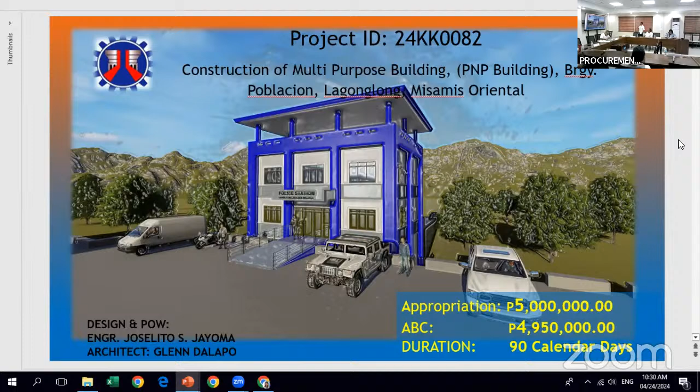Building at Poblacion ng Lagonglong, Misamis Oriental. Appropriation 5 million, approved budget for contract 4,950,000, duration 90 calendar days.

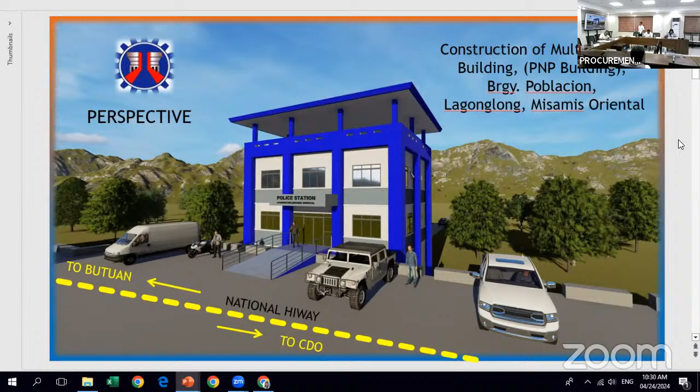Next, so this is the perspective. This is the location map along the highway, and there's a river. So this is the site development plan.

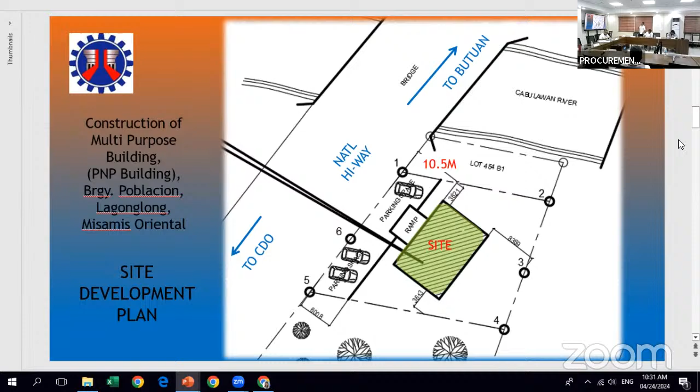We have from the National Highway, 10.5 meters setback from the building. This provision for the widening and building setback is a minimum of 8 meters from the boundary line, from the property line.

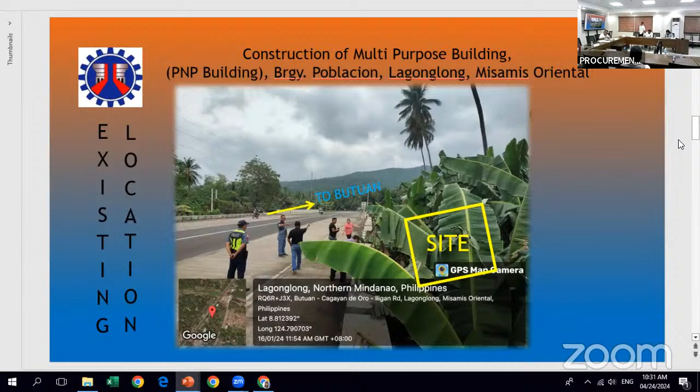So this, geotag pictures. Next, so this is the elevation.

So we are going to elevate the building from the ground floor to elevate the level from the National Road for flooding purposes, because there is no flood control in this area of the river.

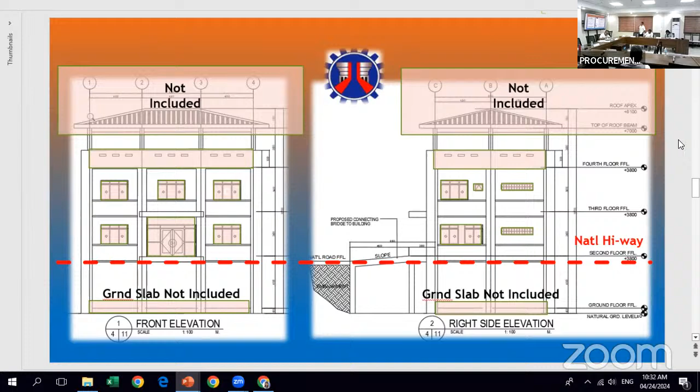Okay, next. So we have to put the fire escape in the building for fire purposes. Okay, next.

So this is the floor plan. This is the standard PNP floor plan. So the ground floor will be open. We don't have to develop this due to flood purposes.

And second floor is the space for the offices, and also third floor and fourth floor will be multi-purpose hall. So this is open only for some technical purpose of the PNP.

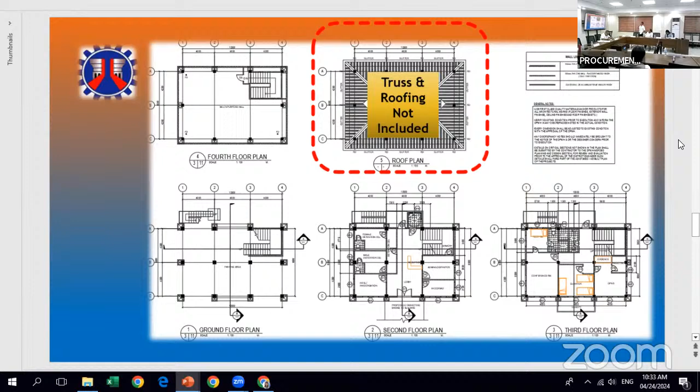Okay, next. So this is the foundation plan. We make the foundation plan into combined footing, because the height of the building is more than third floor.

This is really a third floor, so we need to make a foundation stronger to support some earthquake and some loads of the building. Okay, next.

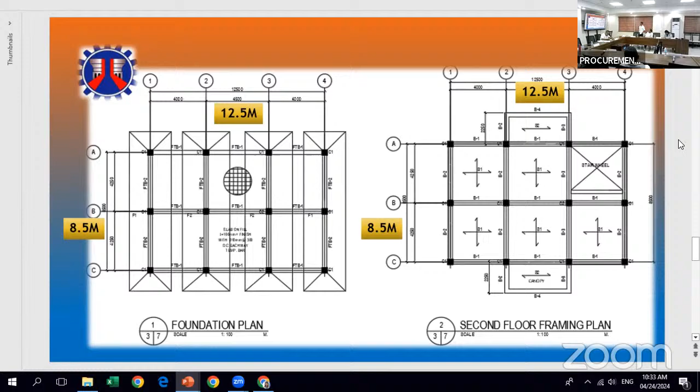So the area of this building is only 12.5 by 8.5 meters. Okay, next. So scope of work: construction of multi-purpose building, PNP building, Barangay Poblacion, Lagonglong, Misamis Oriental, comprising of the following:

So is the reinforcement slab for staircase, also includes second, third to fourth. So the slab of the ground, we have no slab there, only the natural ground. The finishing, so we include also CHB wall for interior up to third floor.

To close the interior wall of the building. So the foundation does not include the CHB wall on fourth floor. There is a CHB wall, it's for railing. Doors and window, wall plus stair, finishing, roof beam, ceiling, roof steel truss, roofing materials,

So, do we have any questions? Okay, thank you, Abhinav.

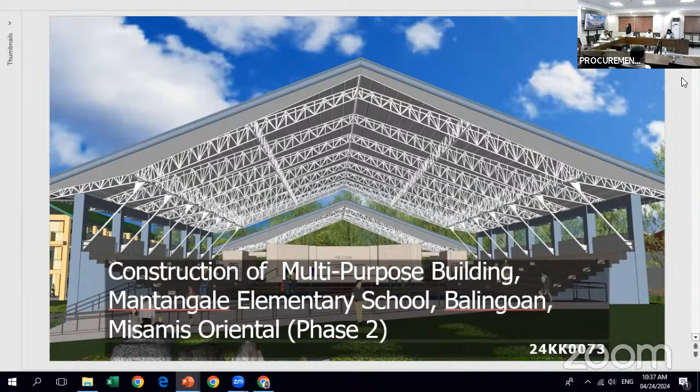Good morning, everyone. For project number 24KK0073, for the construction of multi-purpose building, Mantangale Elementary School, Balingoan, Misamis Oriental, Phase 2. This is the proposed project site. The appropriation of the project is 20 million, and the approved budget for the contract is 19.8 million. The duration of the project is 210 calendar days.

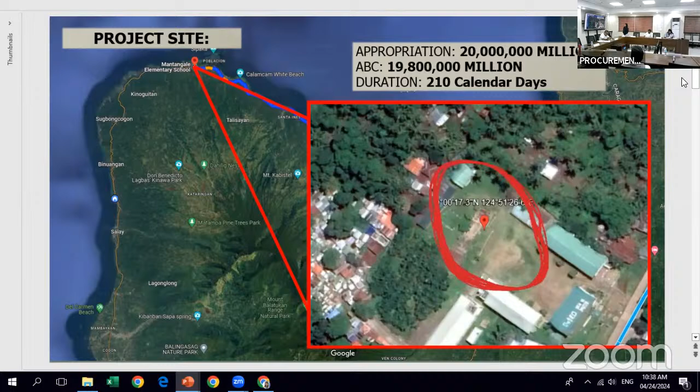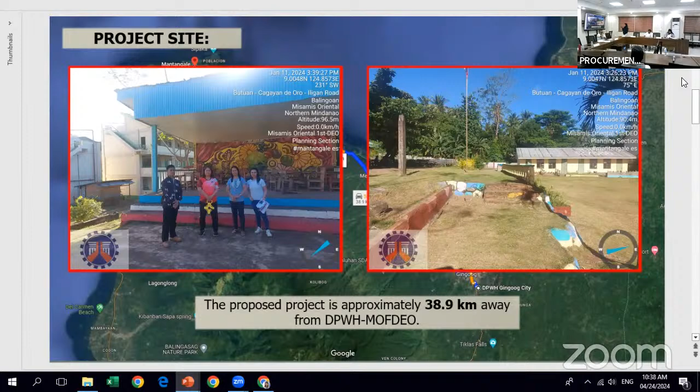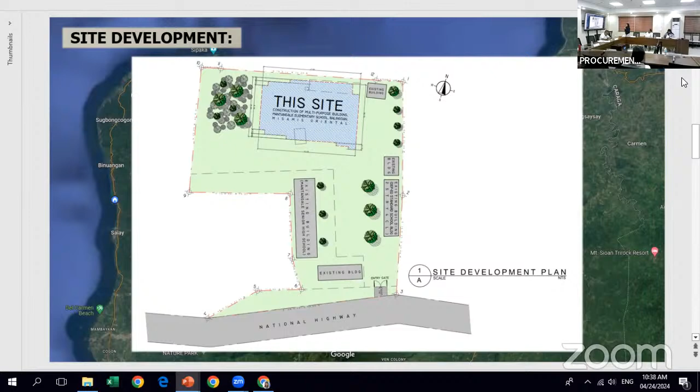These are some site photos. The proposed project is approximately 38.9 kilometers away from DPWH-MOFDEO. This is the site development plan.

This is the floor plan of the project. You can see the court here, and this part is the stage. Each side of the stage has 4 restrooms, for he, she, gender neutral, and PWD restrooms.

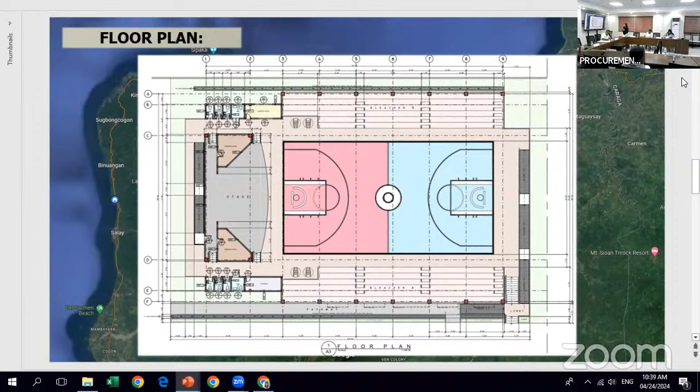So the project scope is construction of a covered court with bleachers and stage, where the scope consists of the following: first is removal of existing stage and 3 classrooms, complete structural components, including reinforced concrete footings, columns, beams, and slab, complete roof trusses and roof sheets, including all roofing accessories.

This includes fascia frame, fascia board, gutter, downspout, and flashings, complete masonry works, semi-gloss finish for columns, beams, bleacher railings, stage and restroom walls, complete doors and windows, complete septic tank and plumbing fixtures, complete drainage canal, and complete electrical works. Due to budget constraint, the following were not included in the scope.

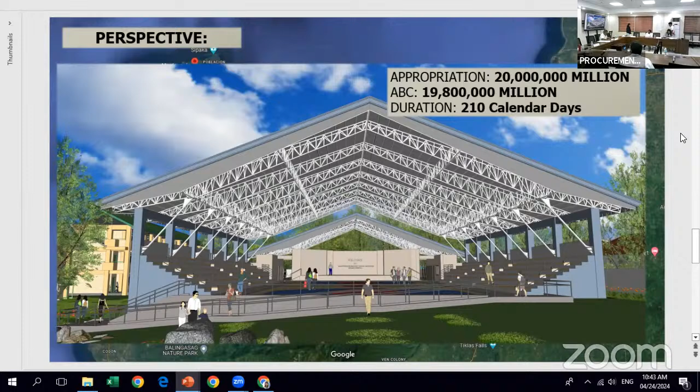Good morning, everyone. I am Engineer Salvador from the Balingoan sector. For the next project, we have construction, rehabilitation of water supply, septage, and sewerage rainwater collector system, or project 24KK0105. Based on the original memorandum, we have parameters to be followed.

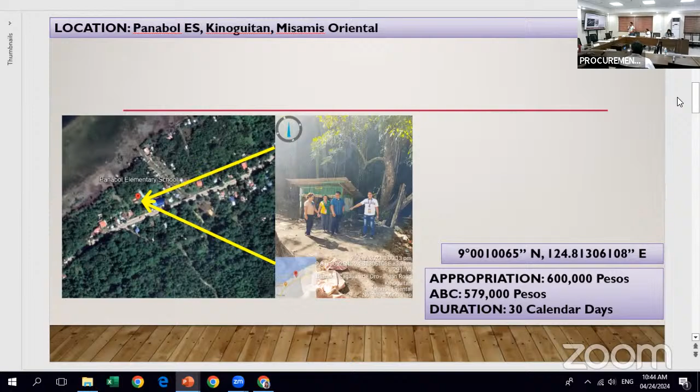Based on the parameters, we have beneficiaries identified for our rainwater collector system. First is Panabol Elementary School in Kinoguitan, Misamis Oriental, with an appropriation of 600,000 pesos and an approved budget cost of 579,000 pesos and a duration of 30 calendar days.

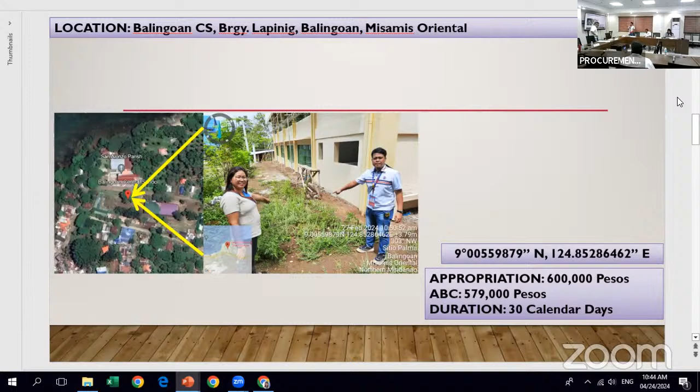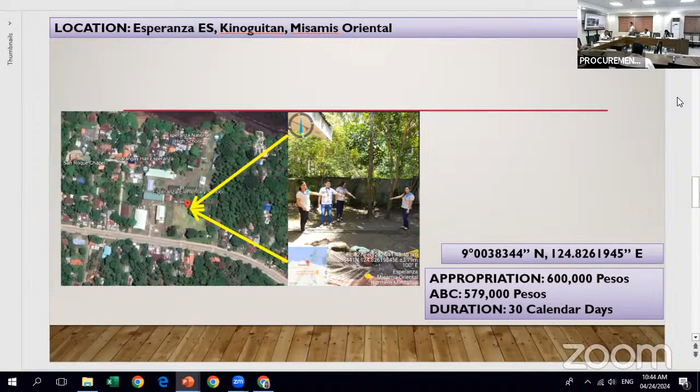Next, we have Balingoan Central School in Barangay Lapinig, Balingoan, Misamis Oriental, with the same appropriation and approved budget cost. Next, Kinoguitan Central School in Barangay Poblacion, Misamis Oriental, also the same appropriation and approved budget cost. Next, Esperanza Elementary School in Misamis Oriental, with an appropriation and budget cost of the same amount. Next is Mantangale Elementary School in Balingoan, Misamis Oriental, with an appropriation and approved budget cost of the same amount.

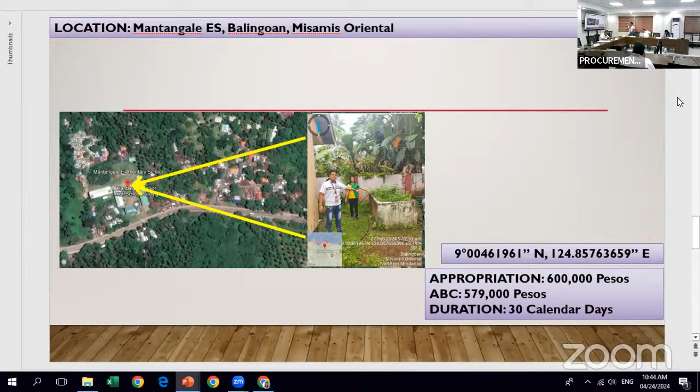For our budget scope, we have provision of stainless storage tank, 1.8 meter diameter by 3 meter, with a capacity of 6,000 liters, complete with accessories including platform, stainless steel ladder, pre-painted gutter with washable, and construction of concrete pedestal.

As a whole, for our 5 beneficiaries, we have an appropriation of 3 million pesos and approved budget cost of 2,895,000 pesos with a duration of 150 calendar days.

For our detailed breakdown of quantities, we have project billboard and signboard for each, since we have 2 billboards each in each site, occupational safety and health at 1 lump sum, mobilization, general scaffolding and shoring, removal of structures and obstruction, clearing and grubbing, and individual removal of trees.

Structure excavation, we have 63 cubic meters. Gravel fill, 4.908 cubic meters. Embankment from borrow, we have 28.526 cubic meters.

Structural concrete, 3,000 PSI, 15.832 cubic meters. Reinforcing steel, grade 60 and 40: 1,358.95 kilograms and 229.35 kilograms. Formworks and falseworks, 22 square meters.

As for the finishing, we have structural steel, 497.38 kilograms. Metal structure accessories, 1 lump sum, and stainless water tank, 5 sets because we have 5 beneficiaries. And for the storm drainage and downspout, 1 lump sum. So that would be all for the 5 beneficiaries of rainwater collector system.

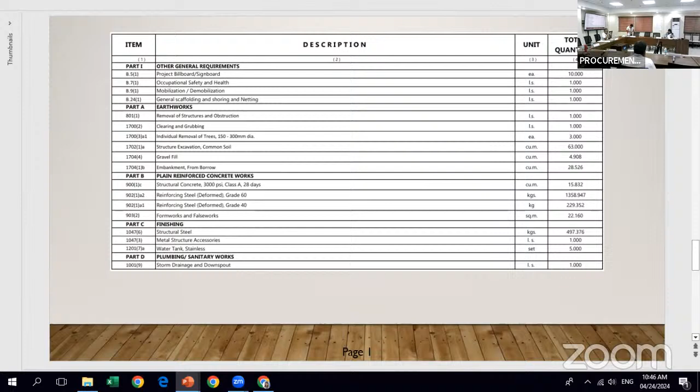Checklist of technical and financial documents and other requirements for infrastructure projects, for the submission and receipt of bids. First, technical component envelope, Class A, legal documents.

Letter A, valid PhilGEPS registration certificate, platinum membership, all pages in accordance with section 8.5.2 of the IRR. PhilGEPS certificate of registration and membership. All bidders shall upload and maintain in PhilGEPS account in the updated file of the following Class A eligibility documents

under sections 23.1 letter A and 24.1 letter A: 1. Registration certificate. 2. Mayor's business permit or its equivalent document. 3. Tax clearance. 4. PCAB license and registration. And number 5, audited financial statements.

Section 8.5.2 of the IRR: for the purpose of updating the certificate of registration and membership, all Class A eligibility documents mentioned in the section supporting the veracity, authenticity, and validity of the certificate shall remain current and updated.

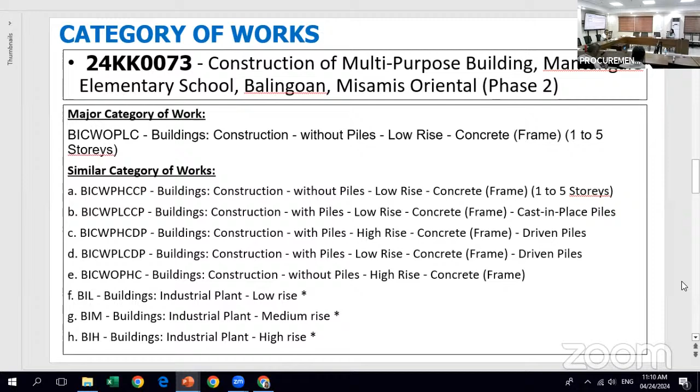For major category of works: for contract ID 24KK0073, the major category of work is BICWOPLC, or buildings, construction without piles, low-rise concrete frame for 1 to 5 stories. Same for 24KK0082, the major category of work is BICWOPLC. And for 24KK0105, the major category of work is WSL1, or water supply for level 1 construction, shallow wells, or rainwater collectors.

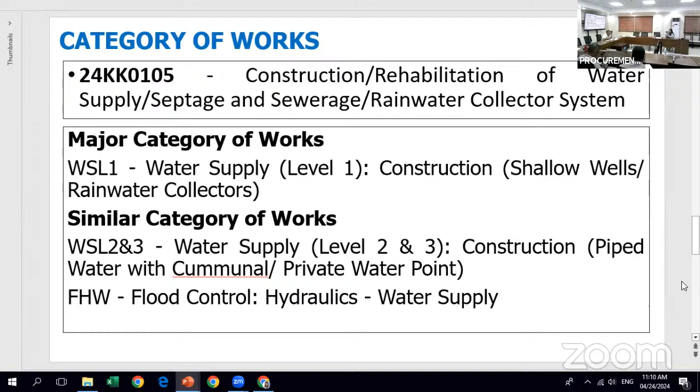This is to remind the respective bidders regarding key personnel - there should be a total of 5 personnel: 1 project manager, 1 project engineer, 1 materials engineer, 1 foreman, and 1 safety officer. There should be no personnel holding 2 or more different positions.

As shown, this is an example of the technical and financial documents. The prospective bidders are encouraged that the bid and supporting documents should be whole and properly done. So that's all, Mr. Chair. Thank you.